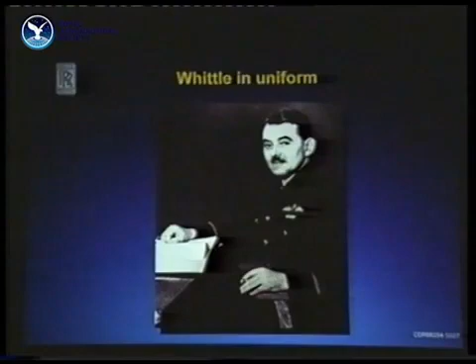I believe that Whittle's pioneering work on the turbojet engine is arguably the most important mechanical engineering work carried out during this century. Certainly, there can be few, if any, in the world whose lives have not been affected by it. It led directly to the availability of long-range, high-speed, high-altitude flight, which we all now take for granted.

I suspect most have forgotten the limitations of piston-engined airplanes, and I sometimes have to remind myself when I'm enjoying the 3-hour Concorde flight to New York, which I'm going to be doing tomorrow, that the first time I flew to the US, it took more than 30 hours, bumping along at 10,000 feet in all weather in a DC-4, with 2 stops on the way for fuel. That was in 1950, when all airlines were still operating piston-engined airplanes.

And it is astonishing to think that the young Frank Whittle had foreseen the requirement for high-altitude, high-speed flight and recognized the limitations of the piston engines in this respect in a paper he had written more than 20 years earlier, at the end of the 1920s. But we were still bumping along at 10,000 feet in piston engines in 1950.

His initial thoughts were based on gas turbine-driven ducted propellers, but he soon realized the possibility of a propulsion jet and patented such an engine on the 16th of January 1930. And there is the famous patent.

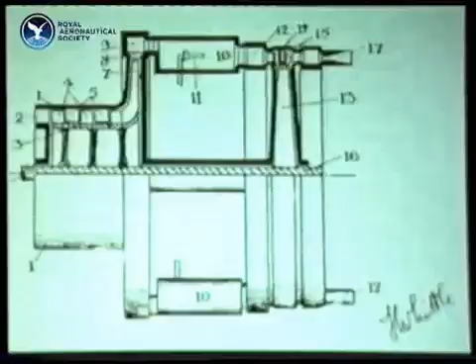His vision was extraordinary when one considers that this work was being done at a time when everyone else was just still undertaking the design of piston engines, and in fact just starting new designs of piston engines. Henry Royce, for instance, was still alive and was completing the design of the Merlin.

Unfortunately, as so often happens in these cases, his vision far outstripped that of the officials. The RAE turned down his proposal, basing their judgment on a 1924 report, which was extremely pessimistic on the possibilities of gas turbine power, mainly because it assumed extremely low component efficiencies. The skepticism was not unique to the United Kingdom.

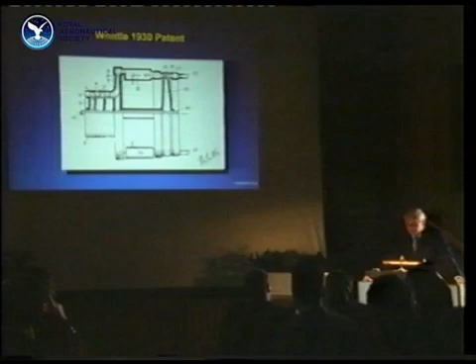10 years after the RAE turned it down, and now in 1940, when Whittle had been running the first engine for more than 3 years, and indeed, unknown to anyone else in the Western world, the first jet-powered airplane had actually flown in Germany. At this time, 1940, the Committee on Gas Turbines, appointed by the US National Academy of Science, wrote...

In its present state, and even considering the improvements possible when adopting the higher temperatures proposed for the immediate future, the gas turbine engine can hardly be considered a feasible application for airplanes, mainly because of the difficulty of conforming with the stringent weight requirements imposed by aeronautics.

Quite interesting that several years later, when Frank saw this report, he said, 'It's a good thing I was too stupid to know this.'

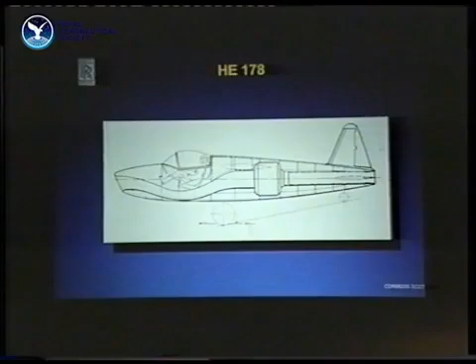The first ever gas turbine powered airplane, in fact, the Heinkel 178, as I referred to a few moments ago, flew in August 1939 and was the result of von Ohain's work based on a patent he took out in 1935, which was 5 years after Frank Whittle's patent.

Ohain is still alive. Indeed, I talked to him only a few months ago in Washington at the memorial service for Sir Frank, and he's still very lively. And he's on record as saying that had Frank Whittle received the support which he received from the German Reichsluftministerium, Great Britain would have had a jet fighter in service 6 years earlier than it actually achieved.

And it's quite interesting to contemplate what difference that might have made to World War II.

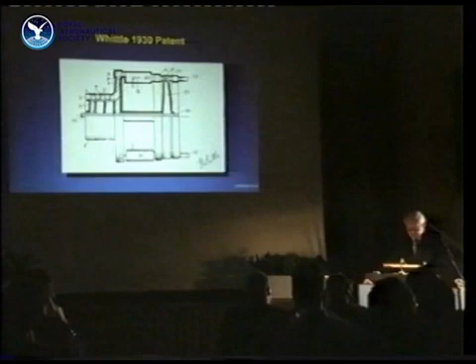A. Griffith was one of the people in the RAE who turned down Whittle's original idea in 1930. But in fact, he was a gas turbine enthusiast, but he was a scientist, and he was committed to the concept of axial flow compressors.

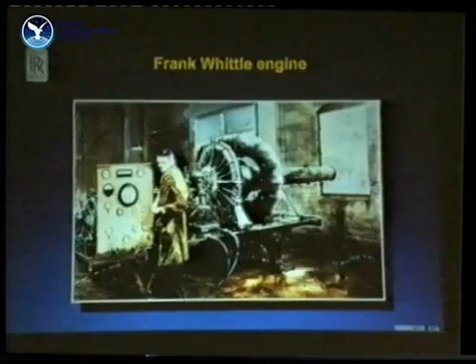Whittle, on the other hand, was a practical engineer and clever enough to see that with the current state of technology at that time, particularly with respect to aerodynamics and materials, the simple, rugged centrifugal compressor was the only practical solution. There were, in fact, several parallel lines of work taking place in the late 1930s.

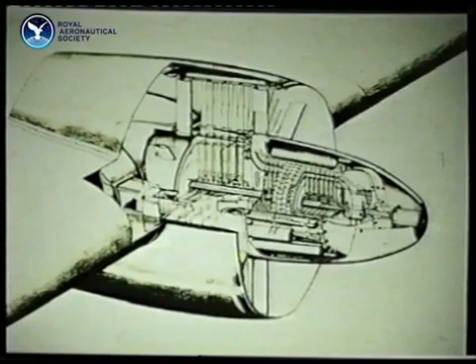And indeed, my own company, Rolls-Royce, was working independently of Frank Whittle on axial flow machines, influenced by Griffith, who had joined the company in the late 1930s. And there were some extraordinary designs. I've shown this one before, but it still amazes me because that was drawn in 1939 at Duffield Bank House, and it's a bypass ratio 5 rear fan contra-rotating device, which is really quite extraordinary that people were drawing those sort of machines at that time.

Early in 1940, Stanley Hooker introduced Hives to Frank Whittle, and Rolls-Royce from that point on got involved in the program and started making parts. There's a very interesting story that when Hives first saw the first engine, he asked how powerful it was. They said it's 800 pounds of thrust, and we think we can get it to 1,000. Hives is reputed to have said, well, that's not enough to pull the skin off a rice pudding.

And Hooker, on the back of a cigarette packet, demonstrated that a Spitfire flying at 350 miles an hour with a Merlin propeller, if you assume 80% efficiency, was being pulled along by the propeller producing about 800 pounds of thrust. That got home to Hives that here was an extremely high potential machine, and he never lost interest.

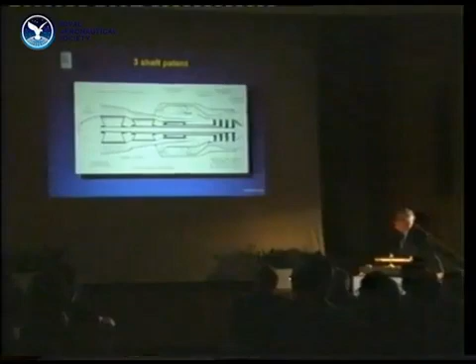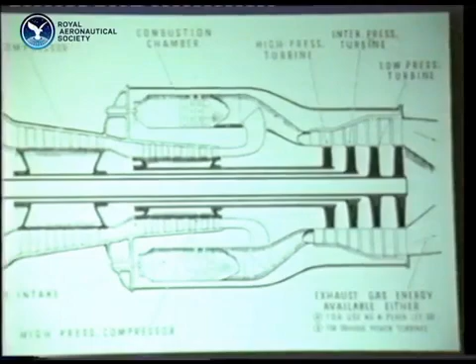However, in parallel with all that, the axial flow work had been continuing at Derby, and there were some interesting ideas emerging. This is a 1945 patent, though the work was actually started in 1943 - the three-shaft engine. In fact, there was an accompanying patent for a high bypass ratio, looking from the drawing to be about 5, with a single front fan associated with that three-shaft machine. I guess they were looking at a pressure ratio of 2 on each of those spools. Nevertheless, it is astonishing that at this time, all of this extraordinary work was being done.

Of course, it was 25 years later when the company picked up the three-shaft idea, and it has been the basis of the success of Rolls-Royce with the RB211 series.

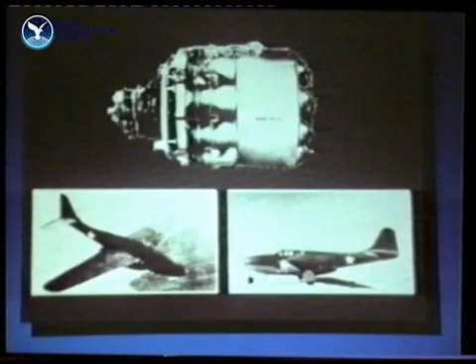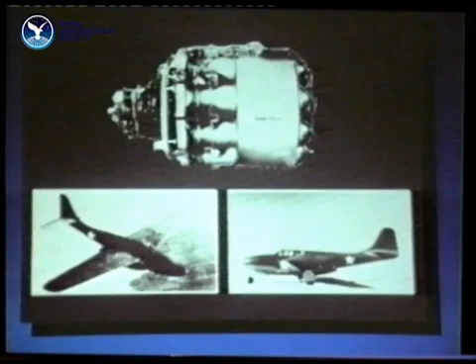In 1941, the government instructed Whittle to pass the design of the W2 and one of the engines to the United States, and General Electric was selected to develop and manufacture the machine, and they moved extremely rapidly. The first flight of that aircraft, the XP-59, powered by the two General Electric engines you see above it, was in October 1942, only 18 months after the first flight of the Gloster E-28/39. So there was a huge compression in the program at this point.

The General Electric and the Americans moved very, very fast. But even in the time of war, the transfer of Whittle's technology to the United States, I think, must be seen as an extraordinary generous action.

It is probable that more Nene engines were manufactured than any other gas turbine in history. Interestingly, we're still overhauling them in our factory in Canada, all this time later. It's quite extraordinary - these machines do last a long time. But that's not really the reason so many were built.

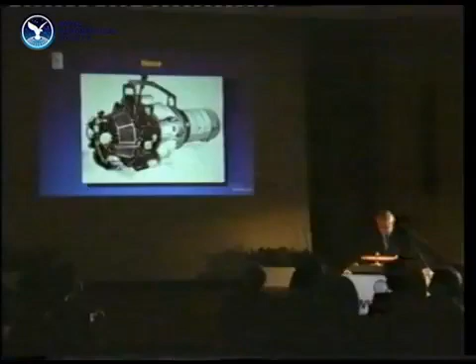Unfortunately, in 1946, Stafford Cripps sold or gave a very small number of Nenes and Derwents to Russia, who went on to produce thousands of engines. All MiGs up to the MiG-17, and several other Russian aircraft, and many MiGs later built in China, were all Nene powered, for which neither the company nor the country received any royalty. There are some estimates that maybe 30,000 engines were produced, or even 40,000.

Much later, when we were asked to go look at engines in Egypt - Russian engines - and whether we would overhaul them, our immediate reaction was, hell no. The last thing we wanted to do was try to do Russian engines. But when we actually saw the engine, we realized we could do it because it was a Nene. Now, this was in the 1980s. Such an astonishing, generous offer that was made to the Russians, for which we paid forever.

Rolls-Royce did at least profit from licensing the Nene and the larger Tay to Pratt Whitney. The US Navy showed great interest in the Nene, and they instructed Pratt Whitney to get a license. P&W, of course, were a piston engine manufacturer, not in the jet engine business at all at this time. The first 5,000 jet engines which Pratt made were Rolls-Royce engines under license, and they went mainly into the Grumman Panther and Cougar aircraft, which saw a great deal of service in the US Navy. So it's an extraordinary thing: all of the big three engine manufacturers of today came into the jet engine from Whittle's engine, either directly or indirectly. They all have come from that common source.

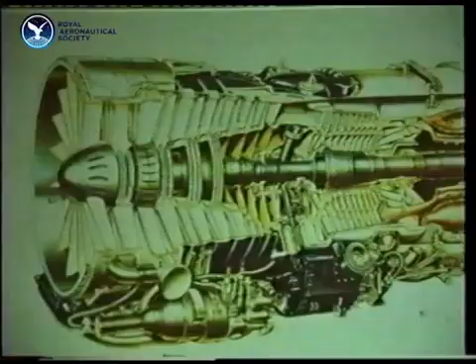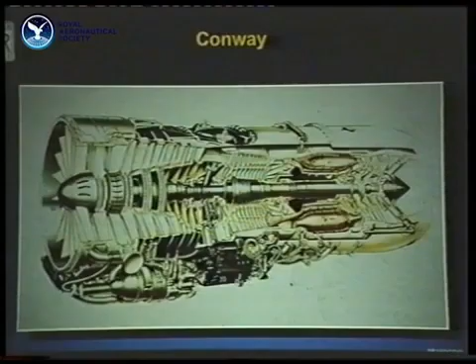The day of the axial engine, as originally proposed by Griffith, did not, of course, arrive immediately. It came quite a lot later, and with great difficulty, through the development of the AJ65, which ultimately became the 10,000-pound thrust Avon early in the 1950s. This was followed very quickly by the first bypass or turbofan engine, finally realizing the idea which was proposed both by Whittle and Griffith. Whittle proposed a bypass engine in the early 30s, and Griffith was working on them in the late 30s. So the Conway finally made it—it was the first bypass engine in the world. It was a miserable little bypass ratio of 0.3, but nevertheless it started the path which has led to today's turbofans, like the Trent 900, where the bypass ratio is 8.6. So a huge movement from the first of the bypass engines.

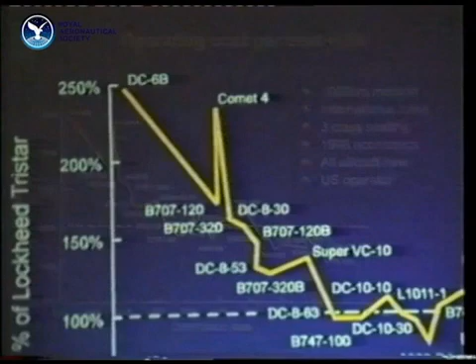The rapid progress which has been made in civil transport during the past 50 years, as a result of Whittle's pioneering work, can be seen from this chart of operating costs against time. You can see the massive reduction in operating costs from the days of the piston-engined aircraft. This, of course, is not just a function of better fuel efficiency and better reliability, but also of larger aircraft, which have been made possible by the much higher powers from the gas turbine engine. And you can see that one is looking at something like 300% improvement in fuel per seat.

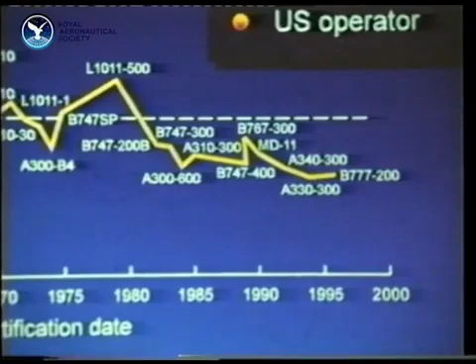That's a strange diagram, actually, because it's based on the TriStar at 100%. But you can see that there's something over 300% improvement over that period of time.

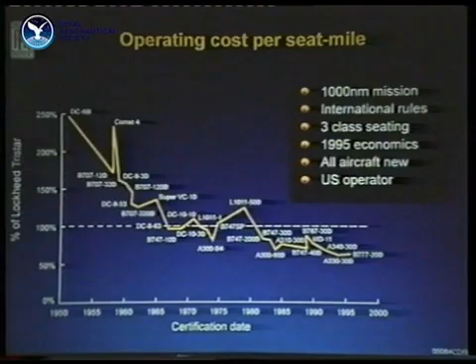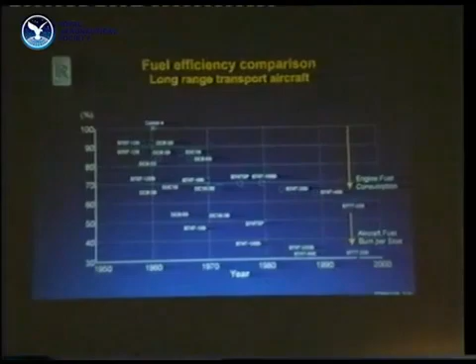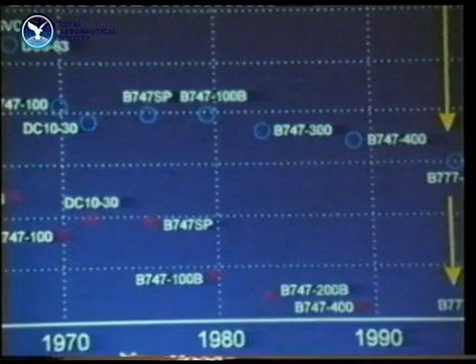If we look at fuel efficiency—and that's rather a fussy chart—over a slightly shorter period, really from the Avon through to modern high bypass ratio turbofans, you can see there's been a 40% reduction in fuel consumption and a 70% reduction in fuel burn per seat. This has been achieved mainly due to improved aircraft aerodynamics and lower weight. But again, massive improvements even from the beginning of the gas turbine engine.

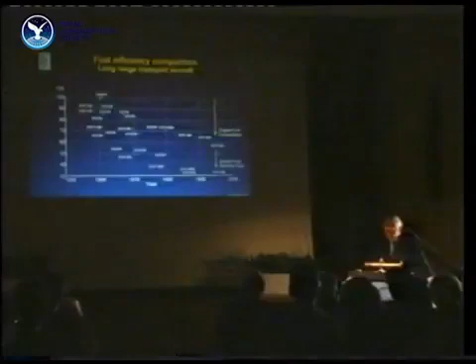And productivity, of course, has increased dramatically over this period. The only serious piston engine civil airplane which we were ever involved in was the Merlin-powered DC-4, called the Argonaut. This carried 40 passengers for 1,600 miles at 240 knots. By comparison, the Trent-powered 777 carries 305 passengers for 7,400 miles at more than twice that speed. So these things are very, very much more productive.

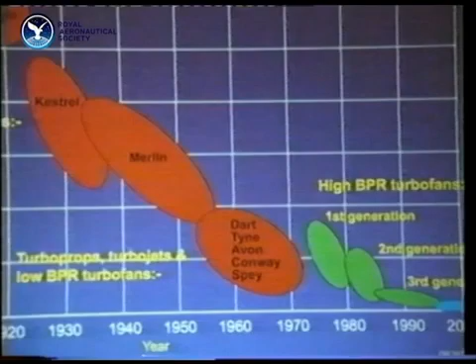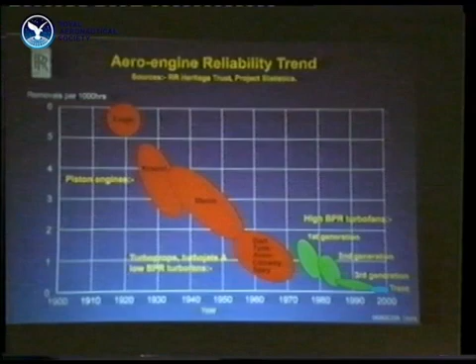The introduction of the turbojet also revolutionized reliability and life of the aero engine. If we look at engine removal rates, going all the way back to the first piston engine we made, the Eagle, in removals per 1,000 hours, you can see it slowly improved as further generations of piston engine came along. But the real significant improvements came with the jet engine, and ultimately we get to third generation, fourth generation turbofans, and it's nearly at the bottom of the scale. I noticed in a recent edition of Flight, I think it was, that they were talking about the last of the large piston engines, the Wright turbo compound, where it said that one could reasonably expect an engine failure on every Atlantic crossing.

And that was not much of an exaggeration. Now, that was a very complicated engine—possibly the least reliable piston engine ever manufactured. However, even allowing for that, it's a remarkable change to today's position, where we regularly achieve 10,000 flights between removals with no shutdowns. So one's gone an order of 10,000 to 1 in terms of in-flight failures.

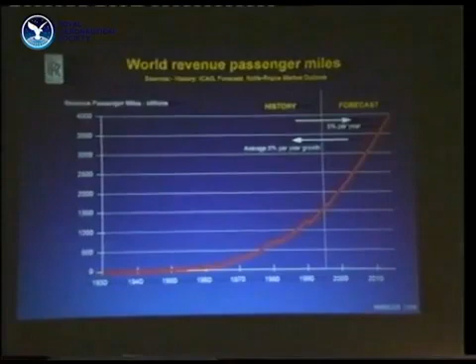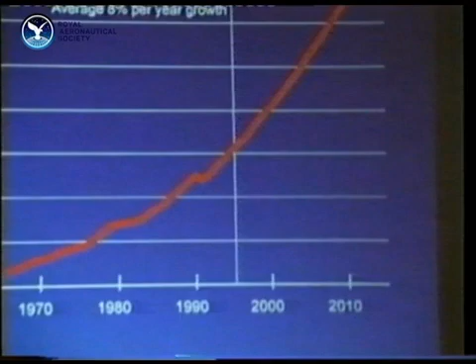The gas turbine, without doubt, started civil aviation as we know it. There was virtually no civil flying that mattered until the early 1950s, and that was the start of first the Comet, and then very quickly afterwards a much more effective, because they were bigger airplanes, the 707 and the DC-8.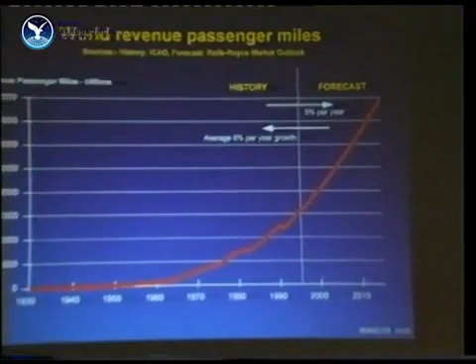That chart doesn't show terribly well, although you can see it, the perturbations that have taken place and which have been very damaging to all of us involved in this business. Both the airframe and the engine business have been exceedingly hazardous in spite of that steady growth and the projected growth out to the right at today's date, mainly because of those nasty little apparent 7-year cycles which have occurred. One hopes those are not going to occur in the future.

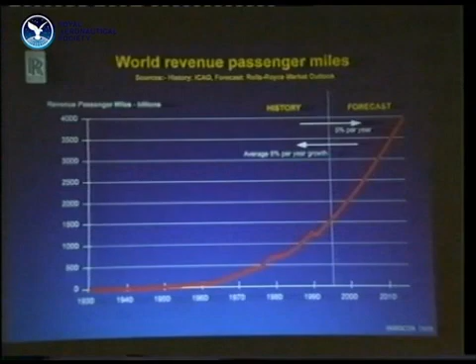But the point is that there are no people in this business or observing this business today who are not at least expecting to see 5% per annum compound growth through certainly the next 20 years. And most of this growth has been made possible by improved airplanes, bigger airplanes, better and more reliable engines.

Now, how's all this improvement been achieved? From the days of the first turbojet, there's been a huge and steady progressive improvement in pressure ratio, turbine temperature, component efficiency, and bypass ratio. You can see there going back from the Avon on through the latest big turbofans.

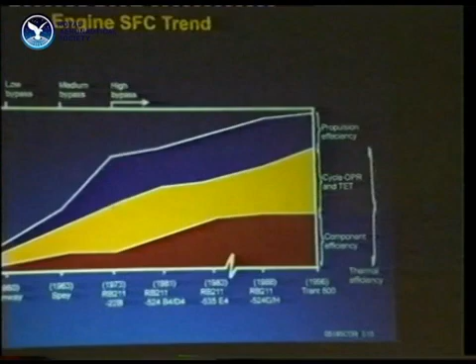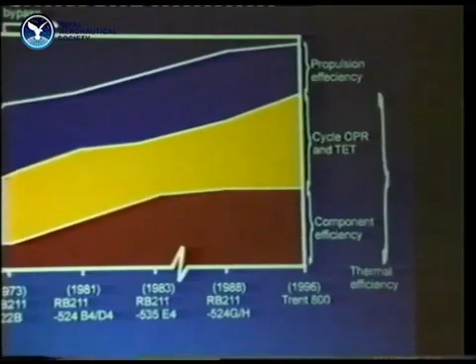To give you some scale to that, Whittle's first engine had a pressure ratio of 4 to 1. Today's big turbofans, the Trents, are 40 to 1. And it is a remarkable step from the beginning of the big turbofans, when we all thought we were going to plateau. There was a huge improvement there, like 25%.

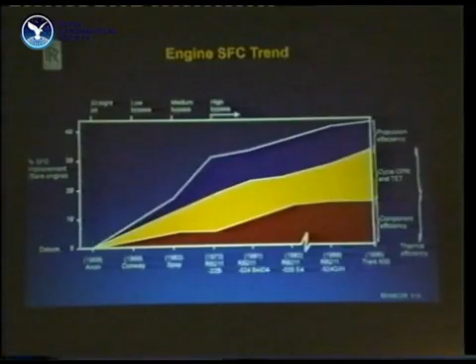There's been another 15 or 20% improvement in efficiency through better components and through steadily increasing the cycle efficiency of the machine. These advances have been most dramatically employed in high-thrust civil turbofans produced by all three of the manufacturers.

My own company has uniquely exploited the original 1945 patent with a family of 3-shaft engines from 40,000 pounds to 100,000 pounds of thrust. The full advantage of the 3-shaft design, which I'm quite sure they didn't see in 1945, is that it was very short, very rigid, and we were able to optimize the aerodynamics. This has been fully realized in these very large engines where we've had a significant weight advantage over the competition simply because of that 3-shaft design, which has taken many, many years to refine to its present state.

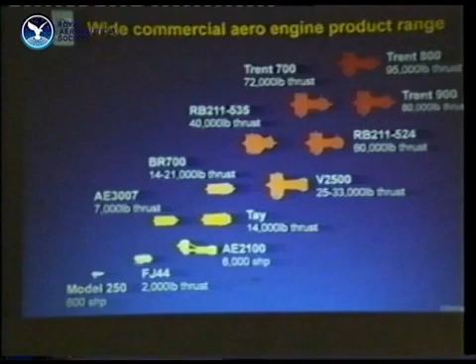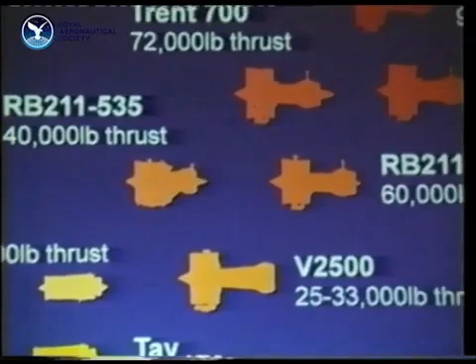But gas turbines have developed in many shapes and sizes and power almost every type of flying machine, as can be seen from this chart, which shows the wide variety of machines. That's Rolls-Royce's civil range of engines, 12 machines from as low as 600 horsepower to 100,000 pounds of thrust. You can see there are turboshafts, turboprops, engines developed specially for helicopters, engines developed specially for other types of vertical lift like the Pegasus, and on up through the big transport engines.

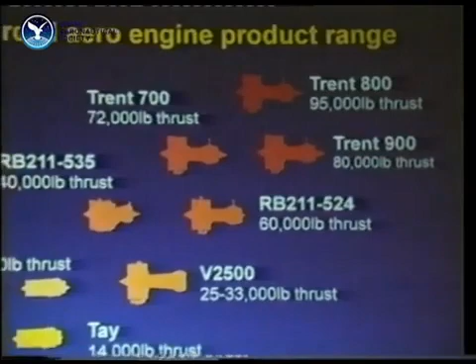Maintaining common technology across a range of engines as wide as that is extremely important, and it is one of the things which we and others are doing as a way of reducing risk and cost, because this is a very risky and costly business, and I'm sure when Frank started this business, he can't have fully realized the full implications for some of the companies involved.

This is a crucial date as far as my own company is concerned, because this is February the 4th. Some people remember February the 4th, 1971. So you get these things wrong, they bite you. And we're doing a tremendous amount of work to make sure that they don't ever bite us again.

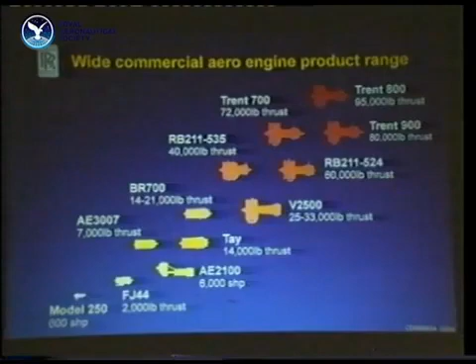One of the things we're able to do here is that if you look at all the turbofans, from the little FJ44, 2,000 pounds, up to the Trent, 100,000 pounds, they've all got common fan aerodynamics. And at the bigger sizes, where they're hollow fans, they all use common manufacturing techniques and facilities. This is very important in reducing costs.

Furthermore, the whole family is able to draw on a common advanced engineering program, and the opportunity to interchange components and technology to produce new derivatives at low risk and moderate levels of non-recurring cost is now becoming clearly apparent to us. So the latest machine, the Trent 900, employs a scaled-down Trent 800 core with the 800 fan.

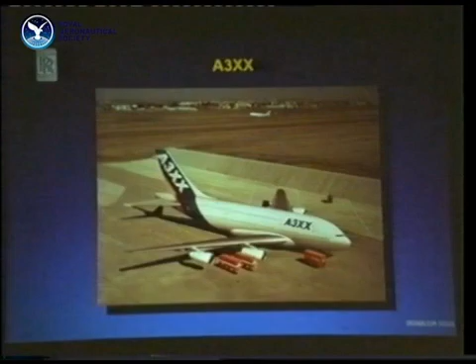That produces a smaller engine of 70,000 to 80,000 pounds thrust, ideally sized for this beast, which is the A3XX, and we very much hope that that machine will be launched, because we, with the Trent 900, have got an

almost perfectly adapted sized machine for those big four-engined aeroplanes. But we've also found that we can scale the Trent 800 core a little more and produce an engine using the Trent 700 fan, all the units which exist, to produce an engine of around 55 to 65,000 pounds thrust. That would be very, very good for A340 growth, 767-400s, if any of these things ever happen. And as it's the right aerodynamic size, in fact, to put into our RB211-535, which powers the Boeing 757.

So with one core, we could have a new machine which would power 4 different airplanes. I'm stressing this approach of progressive development and technical commonality because cost reduction is a big challenge for the next 10 years, maybe forever. Certainly the biggest challenge we all face in this industry. The ability to produce a series of competitive low-risk derivatives will be an important factor in that.

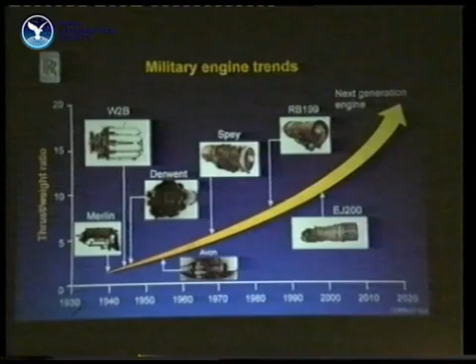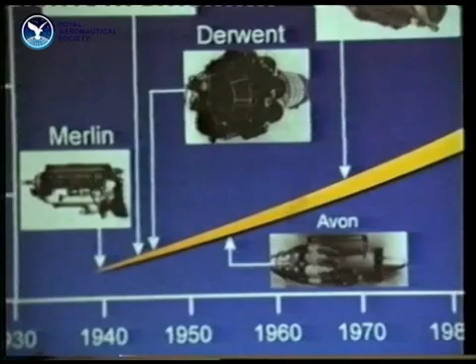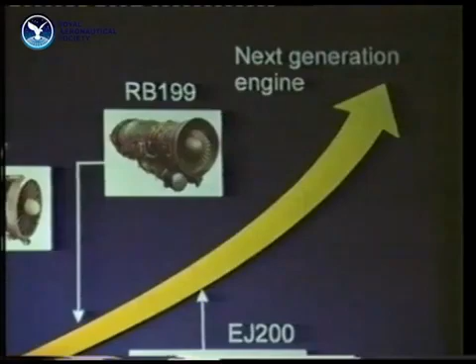If we now look at gas turbines in the military field, we see that the change from the piston engines has been no less dramatic. You can see from that chart that piston engine, the best of the combat piston engines, had power-weight ratios of around 2. And as we've progressed through the gas turbine era, today's engines, EJ200 Eurofighter engine, around 10-to-1 thrust-weight ratio, and we can see machines for the future which we are working on which can achieve 15-to-1 and maybe ultimately 20-to-1 power-weight ratio.

That's very important if one looks at the way the fighter business have gone. They've gone for agile fighters, smaller airplanes, require lower size machines, and you see those are cross-sections of 4 military engines, a Spey through to the advanced machine which we're working on today, all scaled to the Spey thrust. They're all the same thrust. And you can see the huge advances that have taken place and why you can build much smaller, lighter, agile fighters with the machines that we're talking around today, the EJ200 and ultimately the advanced military engine.

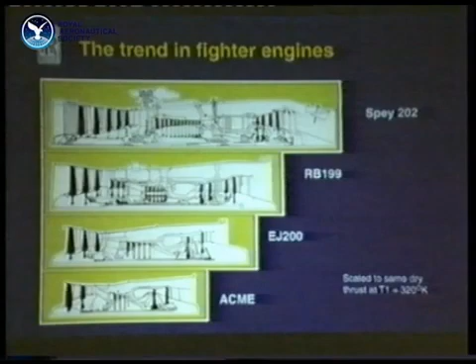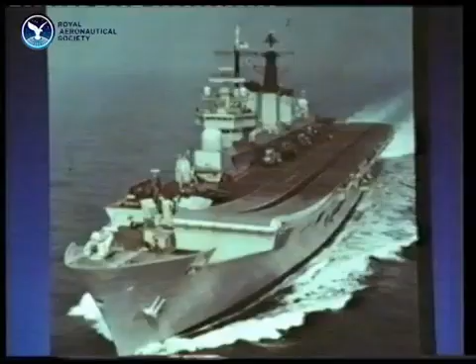And I know from talking to him that he didn't see the extensive use of gas turbines in other fields, which has really become a major business. There is a warship powered by 4 gas turbines which were developed directly from aero engines. And in fact, the exploitation of the gas turbine in other applications has become a major business worldwide.

It's brought exciting new opportunities in fields such as warship propulsion, power generation, gas and oil pumping, and these applications have increased the market base over which one can spread the huge research and development costs associated with the aero engine. It's interesting the navies of the world today wouldn't exist in the form they do had it not been for the money which we all spend on aero engines. There's no way the navies were big enough to develop machines such as the machines which power those warships on their own. But from the aero point of view, to have an additional market over which to spread this huge research and development cost, it's been a very, very attractive proposition.

It doesn't stay at marine. That's the industrial Trent. For the first time, we've developed an industrial engine literally contemporaneously with the aero engine. And this is a 50 to 60 megawatt machine. It's 42% efficient simple cycle, which is the highest efficiency in the world. And we are now looking at possibilities of intercooling this machine up to maybe 100 megawatts.

Now, 100 megawatts in the machine, which would sit pretty well on that raised portion there, is an astonishing thought. This is why the gas turbine, with its huge power density, has made it so attractive for power generation on rigs, in almost any difficult place like the Arctic or Siberia, where you need huge power and low volume. The gas turbine is producing that ever more effectively.

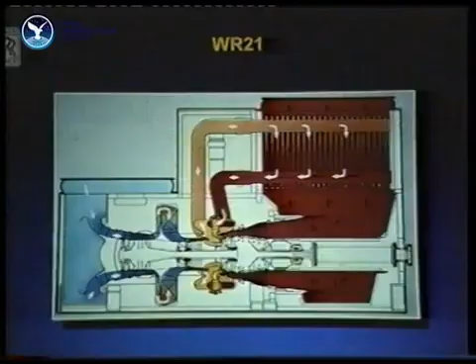This machine will provide diesel engine efficiency over a very wide range of power, from very low power up to maximum power. The importance of that is that all warships today have to have two gas turbines, or a gas turbine and diesel, one for cruising and the other for sprinting. This machine will do both. It's a perfect example of dual-use technology, because that could not have happened without the spin-in from the commercial business to military. Both spin-in and dual-use technology are going to be much more important in the future. We're very excited by that machine, which has now run about 600 hours and looks very, very good.

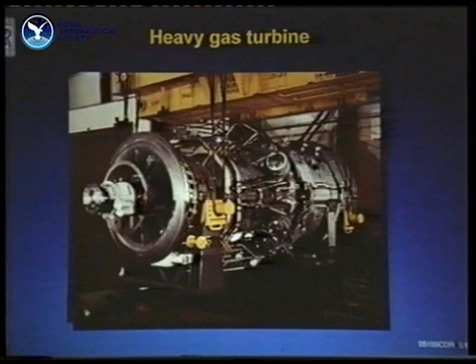That's a heavy gas turbine, which we are also putting aero technology into. These are machines of 150, 250 megawatts. The so-called dash for gas in this country and many other places has been based on this type of gas turbine, mainly in combined cycle, with a steam turbine running off the steam generated from the exhaust of the gas turbine. These are typically 60% overall efficiency, and of course they depend on the highest gas temperature that you can practically achieve in the gas turbine. So the opportunity to draw on the aero engine technology is obvious.

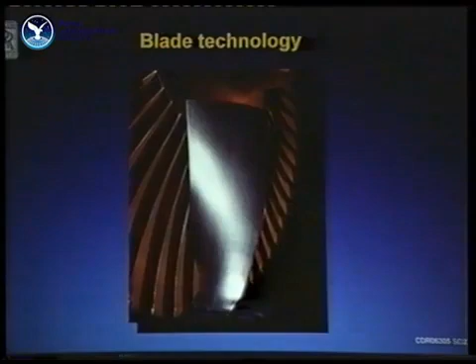Even more surprising is that we've found that we can use aero designs, and indeed some of the technology from the hollow fan blades, in steam turbines. That's a Trent hollow fan blade in the front. Behind it is the last stage, low pressure stage of a steam turbine. We're actually now working on steam turbine blades which are titanium and hollow, and of course going to be much longer, so you can get a much higher expansion ratio. The result is that we can do a 250 megawatt steam turbine in 2 cylinders instead of 3, which will produce a much lower cost solution to the customer. So this aero technology, all of which comes originally from the ideas of Frank Whittle, is permeating almost every rotating machine that we're involved in the world today.

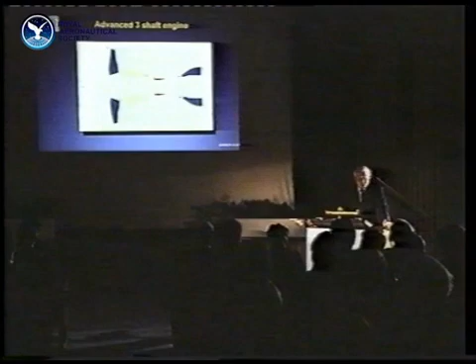The gas turbine, however, envisaged by Frank Whittle, well, he saw it as the ideal power plant for aircraft. And it has proved to have this much wider application. But where is it going to go in aircraft? Clearly development will continue toward both higher power, improved efficiency, and higher temperatures. But these features will have to be associated with progressively lower manufacturing and operating costs.

What we have here is what we foresee as possibly the next generation of commercial turbofan engines. We do foresee that it will be turbofans of moderately increased bypass ratio, maybe 8, 9, 10. We're at 8 now, but 9 or 10. We see pressure ratios approaching 60 to 1, and turbine entry temperatures maybe another 350 degrees centigrade higher than today's engines. So we're talking about huge steps, 40 to 1 to 60 to 1 pressure ratio, and yet higher temperatures. Such a machine would have a fuel consumption about 15% better than the engines which typically drive 747s today. It will have fewer compression stages.

It will use integrally bladed discs. And through the use of low-cost designs and manufacturing methods, could have a manufacturing cost approaching half that of today's machines. Cost is going to be the dominant factor. It's clear to most of us that both first cost and operating cost of airframes and engines have to be reduced if the full potential growth in the civil market is to be exploited. Similarly, if you look at the latest military aircraft programs, such as the Joint Strike Fighter in the United States, low acquisition cost and low operating cost is a major program requirement. So this is the area where most of the exciting work is going to take place in the next decade.

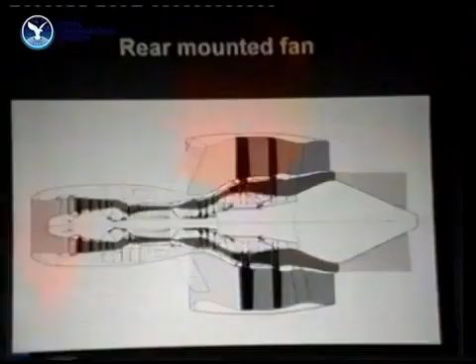Now, the ducted fan might take some interesting and exotic forms, and that's one that is a possibility. And now you see why I said that about Griffith's work in 1940 at Duffield Bank House, because that's a rear-mounted contra-rotating fan, which he was drawing in 1940.

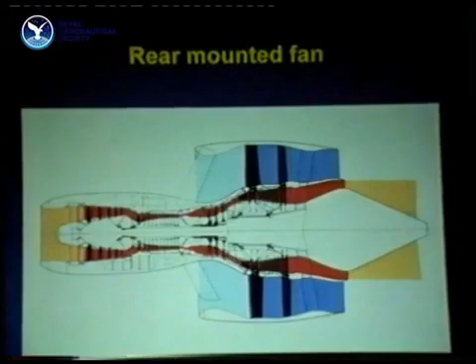Now, there are people in this audience who come from the airframe industry, and most people in the airframe industry, when they see that, tell you to go away, because it's a great idea for an engine, but it's very difficult to put into an airplane. But it does have some great advantages from an engine point of view, because once you take away the fan and the shaft down the middle, you can bring the diameters in, you can have smaller compressors, and they're lighter and more efficient. But it is tough to put it in an airplane. But maybe that's one of the ways things will develop.

Now, if we can get those a little smaller and a little lighter, why couldn't you use them on aero engines? And I think there may be an opportunity for us to cool the cooling air. That would be quite powerful. Intercool the compression stages, or even regenerate the engine, but that's much more difficult. You saw how big that regenerator was on the marine engine - it was bigger than the rest of the engine. But cooling the cooling air and cooling the compression stages may be on.

Another important issue could be a breakthrough in materials, in particular reinforced ceramics. It is conceivable that one might foresee a gas turbine that had no internal cooling air. And if we could do that, we could eliminate the parasitic loss associated with the cooling air, and that would improve efficiency by maybe another 5%, maybe a little more.

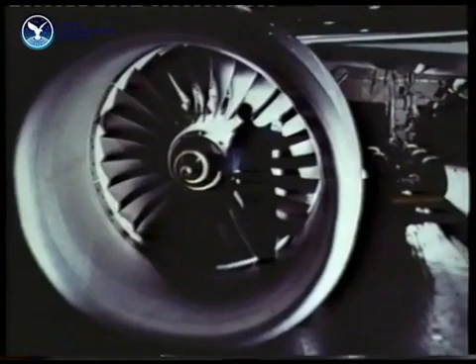We class big engines as anything more than 40,000 pounds of thrust. We believe that more than half of these 18,000 airplanes will require engines of greater than 40,000 pounds of thrust, high bypass ratio turbofans. And for the Trent family alone, we are foreseeing a 20-year revenue stream approaching $40 billion US. At the moment, we've acquired about $5.5 to $6 billion worth of business with the Trent family.

So we think we can see fairly clear lines of development for the whole industry during the next 20 years. And indeed, if we look at the next 10 years, as far as we're concerned, it's quite easy for me to say pretty well everything we're going to do, we've already planned or committed, which is, I guess, a surprising thing, but it shows up the long-term nature of this business.

However, whilst I'm standing here saying this, there may be another Frank Whittle out there somewhere. And I don't think we should ever rule out the possibility that if there is someone out there with an idea, he could make us all look like the piston engine people of the 1930s. And the idea might, like Whittle's machine, change the lives of all of us forever. Thank you very much.